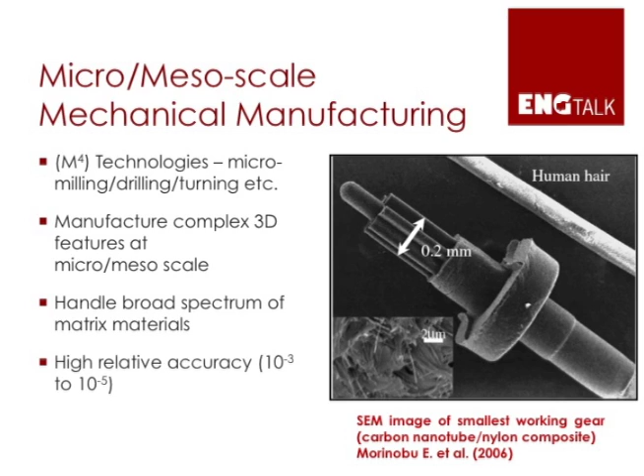So that means our tooling now might be much smaller than the diameter of your hair. Our spindle speeds are going to be much higher than what is used at the macro scale, and so forth. These processes are gaining a lot of significance for the industry here in the United States because they are used for making high-value products.

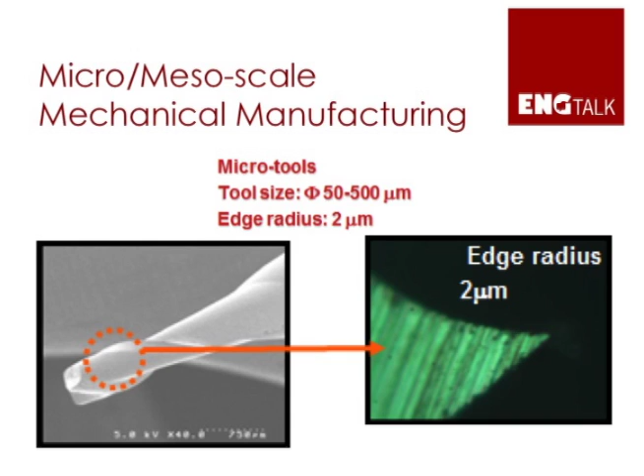The diameters of these tools could be anywhere between 50 microns to 500 microns. To give you a size scale, 100 microns is roughly the diameter of your hair. The key thing to notice here is the edge of the tool, the edge radius, which essentially dictates how sharp the tool is. In this particular case, it is around 2 microns, and that's typically the edge radius that we see in these tungsten carbide tools.

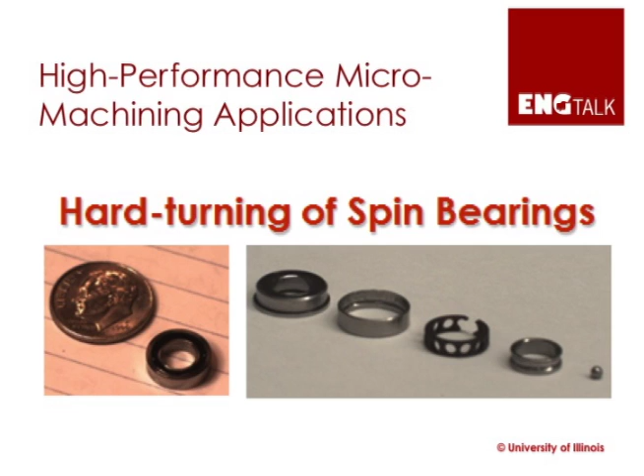Now, to give you a practical product that technologies like these are used to manufacture, this one here is hard turning of spin bearings. Typically, spin bearings, the size scale that you see compared to the penny on the screen, these are typically ground, but we use turning operations at the mesoscale to actually make the part.

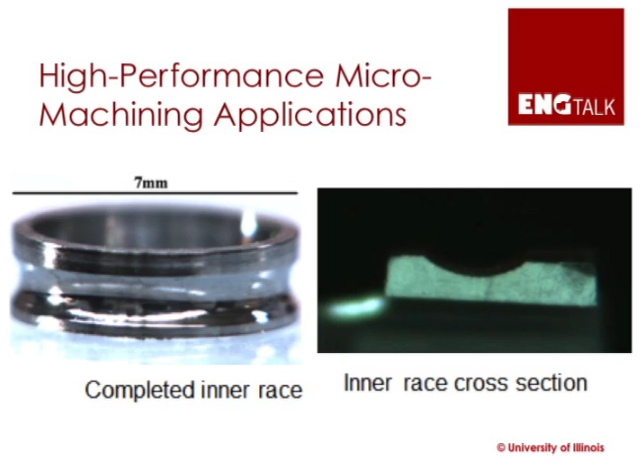And there are two components of this particular spin bearing that are of interest. One is essentially the inner race, against which the balls push when the bearing is in operation, and the other one is the outer race, which is essentially the cage that sort of keeps the balls in place.

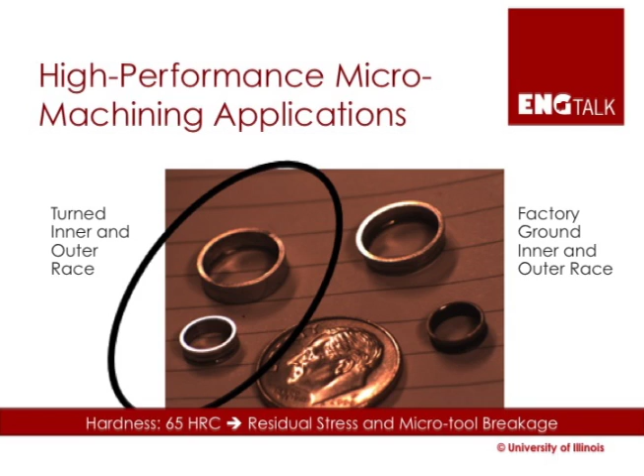The neat thing about this particular application is that when you look at how hard these materials are, they're extremely hard. They've got 65 Rockwell C in terms of their hardness. And when you're machining such hard materials using microscale tooling, there are two things that you have to really take into consideration.

One is, of course, the breaking of our tools. Again, these tools could be finer than the diameter of your hair. And the second thing is when you're cutting such hard materials, there's extreme heat, high cutting forces that are produced, so you might end up adding residual stress in the part, which again needs to be carefully monitored.

So the way to get around these problems is obviously with the use of cutting fluids, which is what we use at the macro scale also. But now at the scales that we are talking about, the delivery of the cutting fluid becomes the issue, because unlike what you do at the macro scale, wherein you turn on a tap and you let the cutting fluid just penetrate into the tool and workpiece region, at the micro scale we cannot do that, because if we do that particular sort of delivery, our cutting tools are going to break.

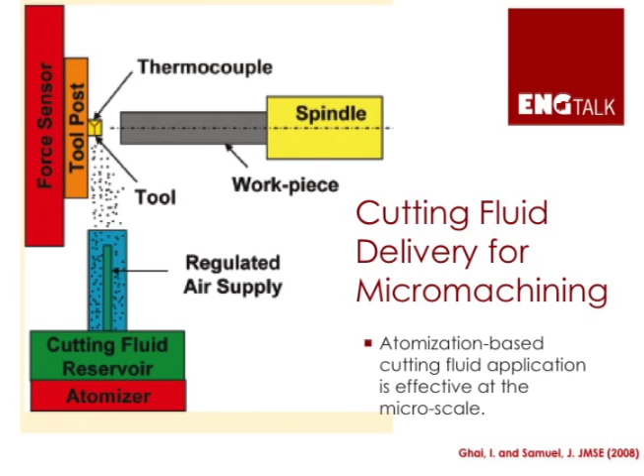And besides, you may not get effective penetration of the cutting fluid into the cutting zone, which are really small dimensions. So the idea is to use atomization techniques. To put it in plain words, it's a glorified humidifier. So we are able to churn out cutting fluid droplets.

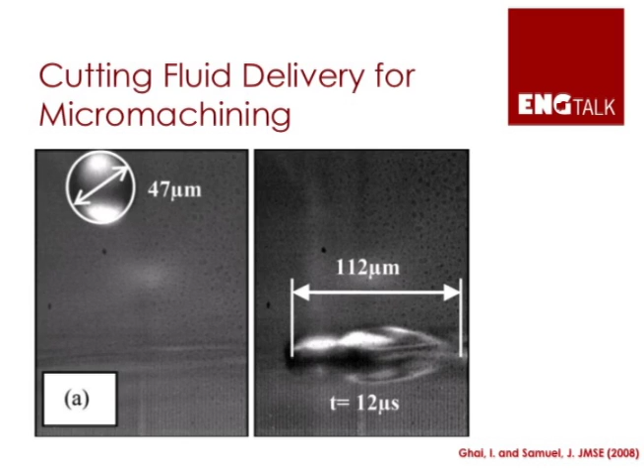These droplets could be as small as 20 to 40 microns in diameter. And when these droplets of cutting fluid reach into the cutting zone, they're able to penetrate that tiny interface between the tool and the workpiece and provide lubrication.

Of course, there are two things that you have to always watch in terms of cutting fluid efficiency. One is, does it cool the part? Second thing is, does it reduce the cutting forces? The cooling in this case particularly comes from the evaporative cooling of the cutting fluid once it impacts the surface. And the reduction in cutting force comes from the oil content that is there in the emulsion.

One thing that we are finding at the micro scale is if we want to increase the lubrication efficiency of the cutting fluid, we have to increase the oil content in the cutting fluid. And what this does is it has a detrimental impact on the performance of the atomizer. If you add more oil into the cutting fluid, the atomizer is not going to be able to pump out tiny droplets. So the key is to increase the lubrication performance of the cutting fluid without increasing its viscosity.

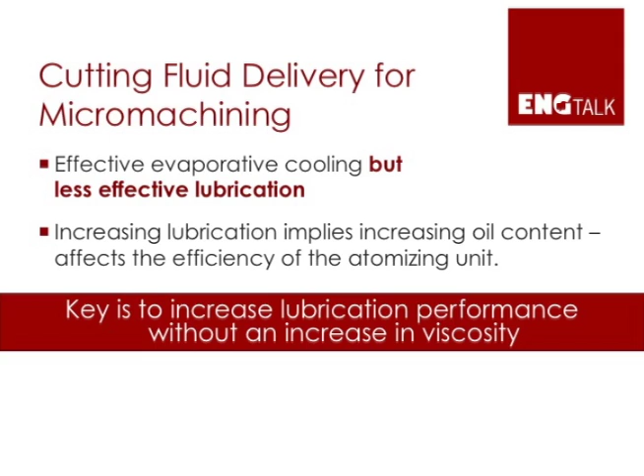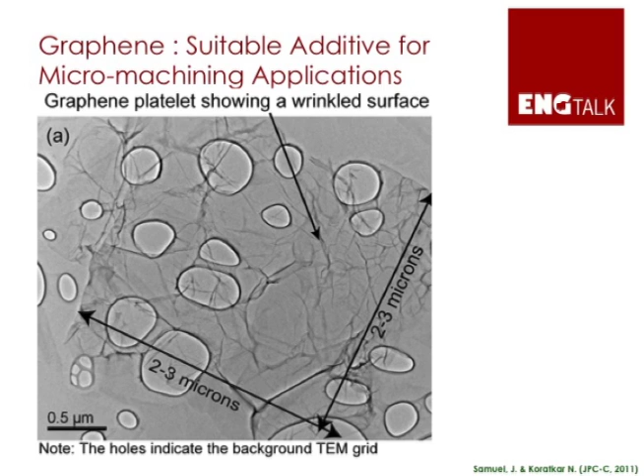And the way we are trying to do this is by the use of nanoscale additives. The particular additive of interest is graphene. The image on the slide shows the lateral dimensions of a graphene platelet. Essentially, graphene is layers of carbon atoms stacked one on top of each other. The lateral dimensions are roughly in the 2 to 3 micron range.

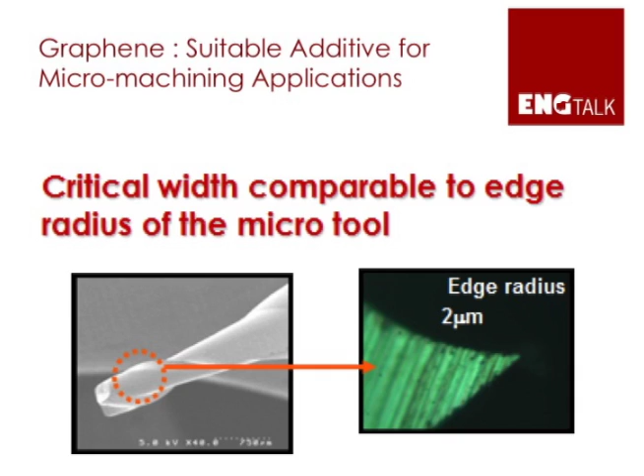The reason why we chose this particular additive is because of its lateral dimension. If you remember, the edge radius of the tool is around 2 microns. So the idea was, would graphene be big enough to just go in and wrap that edge as a blanket when the tool is actually performing the cutting operation?

The other thing about graphene which allows us to do this particular operation is the fact that its thickness is extremely low. When you look at the cross-section of the graphene platelet, what you find is these are made up of 3 to 4 individual graphene sheets. The overall thickness could be as small as 2 to 3 nanometers.

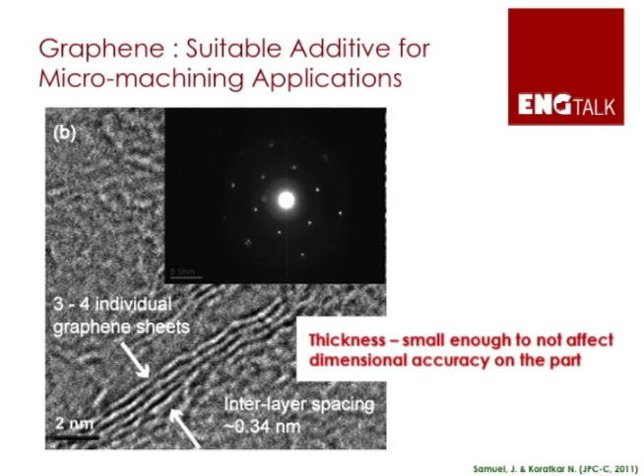So what you have is an additive which is thin enough to go into the interface between the tool and the workpiece, provide cooling and lubrication hopefully, without interfering with the dimensional accuracy of the part. So we tried this out and we monitored the cutting temperatures as well as the cutting forces that were obtained when we used graphene suspensions.

So this data that you see on the screen is a plot of the cutting temperature profiles that we see. The blue line there shows the baseline data. The baseline data was off of Castrol Clearedge 6519, which is a semi-synthetic cutting fluid that was used at 12.5% dilution. We took that cutting fluid and added to it varying concentrations of graphene platelets all the way from 0.1 up to 0.5% by weight.

And what you see is the plot of the cutting temperatures. The thing that you find is the addition of graphene into the cutting fluid drops the cutting temperatures that you encounter. In fact, it's a pretty significant drop. A maximum drop of around 42% was observed.

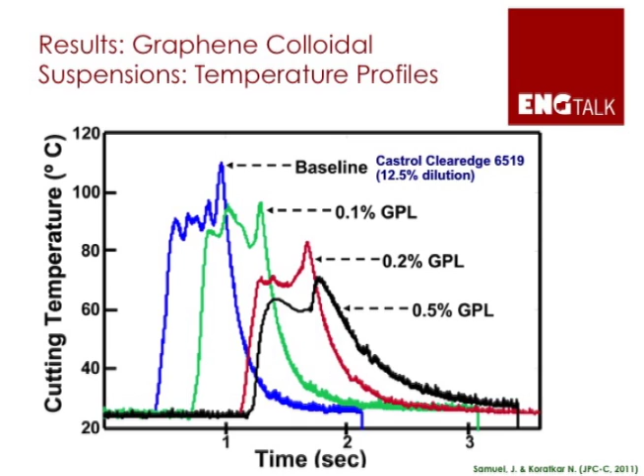The other thing about these experiments that we found is that graphene outperforms both single-wall as well as multi-wall carbon nanotubes. So in that sense, it is a superior additive in terms of reduction in cutting temperatures.

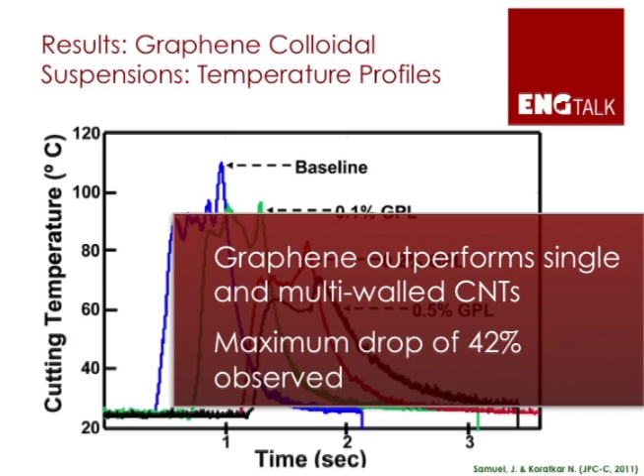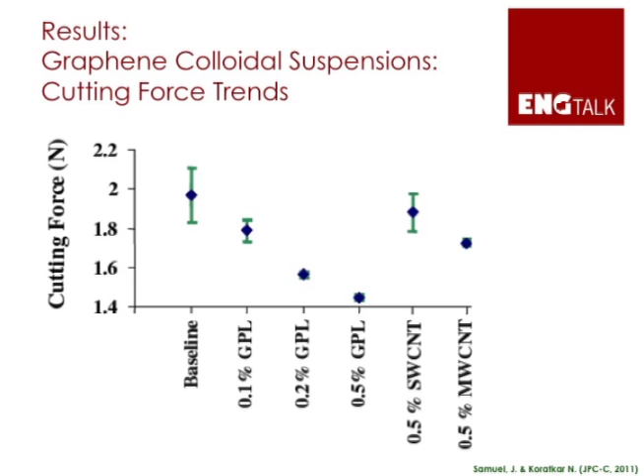The other thing to notice is the cutting force. As you look at this particular graph, what you find is the addition of graphene is again reducing the cutting force, as seen by the first 4 data points. Notice that we are getting around 26% reduction in the overall cutting forces with only an addition of 0.5% by weight of graphene. This again, as you look at the 2 other peripheral data points, is significantly better than the single-walled and multi-walled carbon nanotubes.

Of course, we have to look at viscosity trends because that was the main goal of the study. If we increase the viscosity too much, we are back to the same problem in terms of the performance of the atomizer. What you find is that the addition of graphene barely increases the kinematic viscosity of the cutting fluid.

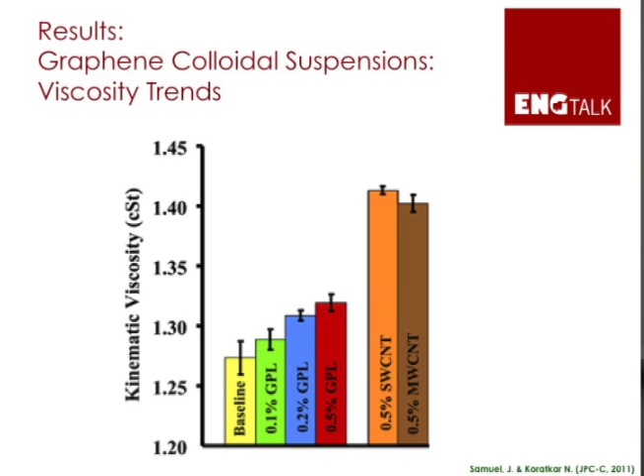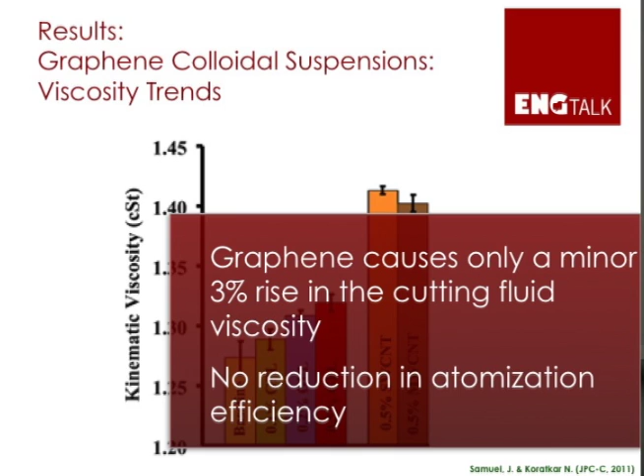In fact, what we see is only a 3% increase in the overall viscosity of the cutting fluid, and this is significantly lower, again, from the viscosity increase that we see by the use of both single-walled and multi-walled carbon nanotubes. So this is telling us we will be able to deliver this cutting fluid through the atomization system without any loss in the atomization efficiency, which is exactly what we were hoping to do at the onset.

The other thing that we were interested in looking at is how graphene changes the spreading behavior of this micro droplet as the droplet touches the tool and workpiece interface. And the thing to note there is the contact angle trends. And what we are finding is there is a reduction in the contact angle of the cutting fluid with the workpiece, with an increase in graphene concentrations.

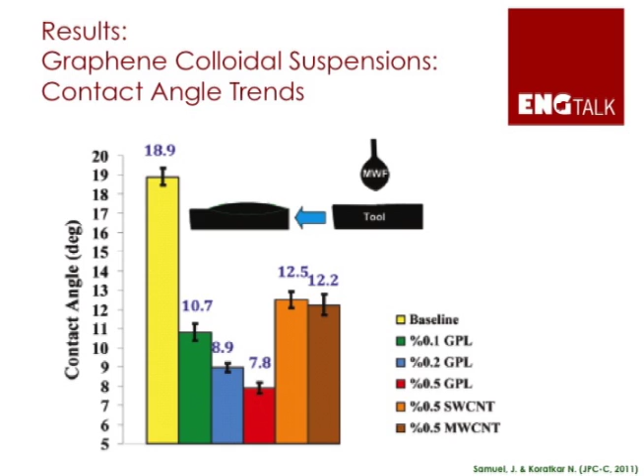This reduction causes greater spreading of the cutting fluid onto the surface. In fact, there is a 58% reduction in the contact angle.

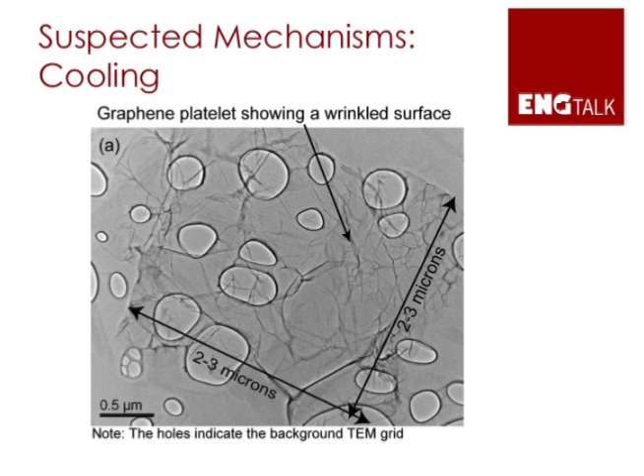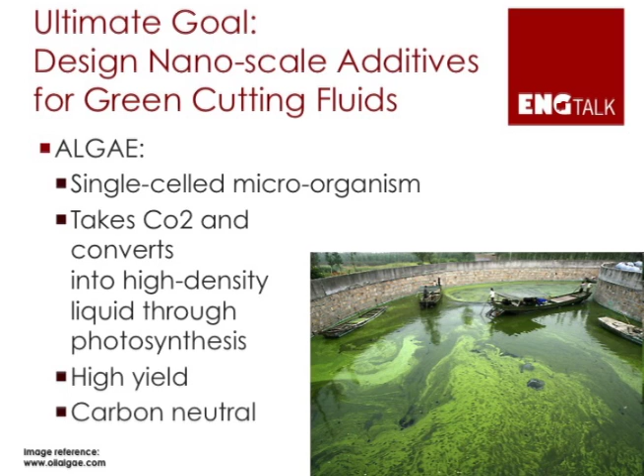The ultimate goal of this work is to design graphene platelets for use with green cutting fluids. And one particular cutting fluid that we are interested in is the oil that we get out of algae. Algae is a single-cell microorganism that grows in common places like ponds and other water sites. Essentially, it takes in carbon dioxide and converts it into high-density liquid through photosynthesis. So in some sense, it is truly a carbon-neutral oil source.

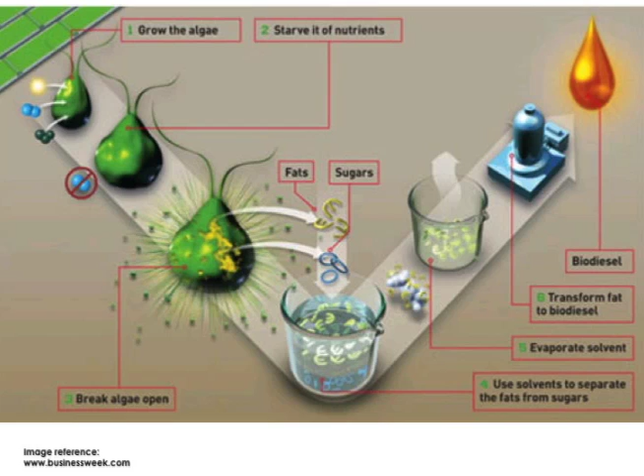But right now, if you look at algae oil in terms of a suitable use towards machining applications, it is not there yet in terms of its ability to provide cooling and lubrication for high-performance machining. So our goal is, can we engineer graphene platelets? What I mean by that is not only the lateral size scale and the thickness, but also the chemical functionality that the graphene should have so that it disperses well within algae oil.

Because if we can do that, what we hope to achieve is truly the engineering of high-performance green cutting fluids, and that would take it to the next level in terms of applications. So we are hoping to get there through this NSF-funded project.